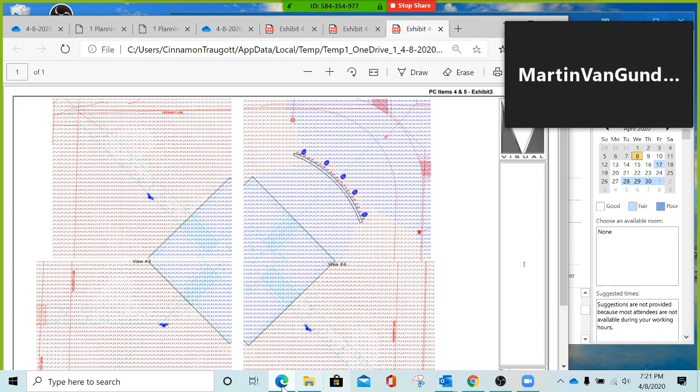With the one comment I'd like Planning Commission to discuss: there is a portion in the code, 113.308, which talks about the smooth side of the fence needing to face out. Now, I'm in agreement with the applicant that the side with the architectural features is the more pleasant side, and that's the intent of that section. The applicant is proposing to place the side of the fence with the architectural feature towards the residents along 9th Street. Technically that does not meet the letter of the law for the zoning code. However, I believe the intent was to put the nicer side of the fence out, and I agree that would be acceptable, provided there's no objection.

This is Tim Fox, and I agree. I believe the intent for that ordinance is that someone putting up a wooden fence, when one side is more attractive and finished-looking for the neighbor and the other side is less attractive, the intent is that the side facing your neighbor should be the more attractive one. And I believe that was captured here.

Thank you, Mr. Fox. With that, I'll throw it out to the members of the Planning Commission. Are there any questions or comments? ...see the height of the fence.

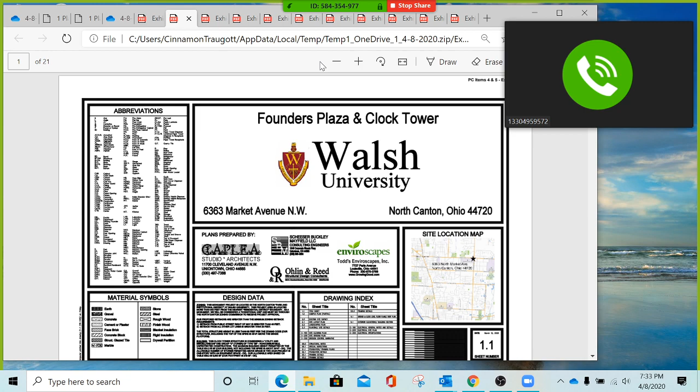This is for the Walsh Clock Tower monument, part of the former BP site at Market and East Maple. We have approximately 155 feet on the East Maple side and 163 feet on the Market side, totaling about 0.57 acres. Last late summer or fall, North Canton approved the zone change from the original BP business to park and institutional. I don't have the exact date, but it was last late summer, fall. If I could go to the next sheet, 1.2, please.

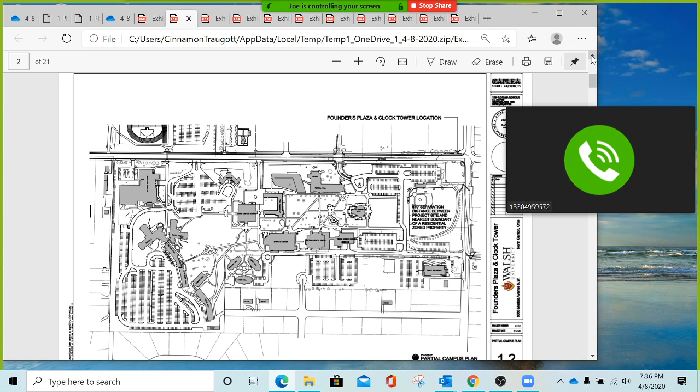Okay, 1.2, so I can get there. All right, sheet 1.2 again just shows the BP site on the corner, and it shows that we are basically more than 300 feet from the nearest residential use, which would be just south of McDonald's. I've got an arrow on there that shows we are approximately 570 feet to the parcel with that residence on the corner. This was, we just wanted to have the campus map to show our relationship to the residential.

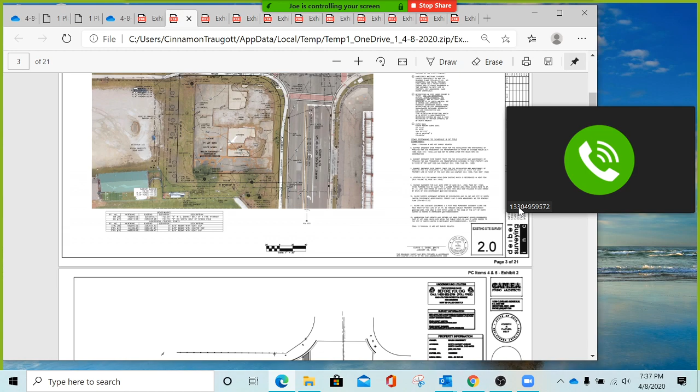Okay, the site survey basically shows here, again it's an aerial, or a regular survey with an aerial photograph on it, that just shows the site the way it is right now. It's pretty much just the old paving that has remained from the BP station, and then they tore the building down and put gravel on that, but basically a lot of hard surface just remains on that site.

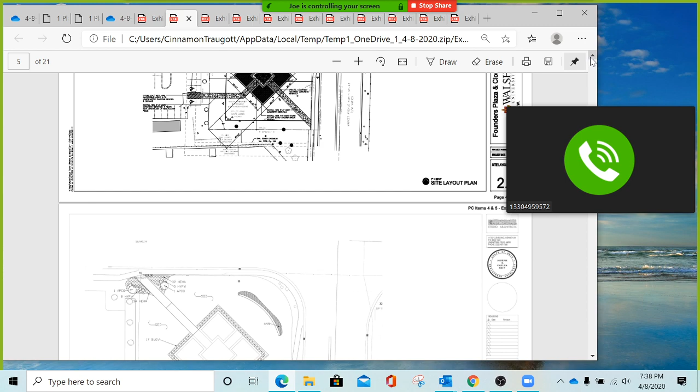Okay, this is our site plan, and again, we have our Market Avenue and our Maple Street. At the center of the site, basically, is our, I'm going to say it's about a 256, or 215 square feet structure. It's not really a building.

No occupancy is going to be inside of it. And I have that in the center, which is going to basically house statues from the original founders of Walsh, or the chapter in Maine. These are historic statues that are coming down and are going to be set underneath the tower.

We have basically sidewalks coming in from both the north and east sides, and then we show another sidewalk coming back to an existing gravel parking lot that would be right adjacent to the baseball building. Again, it's gravel, and down the road this will be improved, and then we are showing where they would pick up handicap accessible parking spaces here adjacent to our site.

Basically, we have concrete sidewalks. The cross sidewalks in the structure itself are going to be a textured stained concrete, and then the pavers on the four corners are going to be similar to the pavers and stone edge that are installed throughout campus currently.

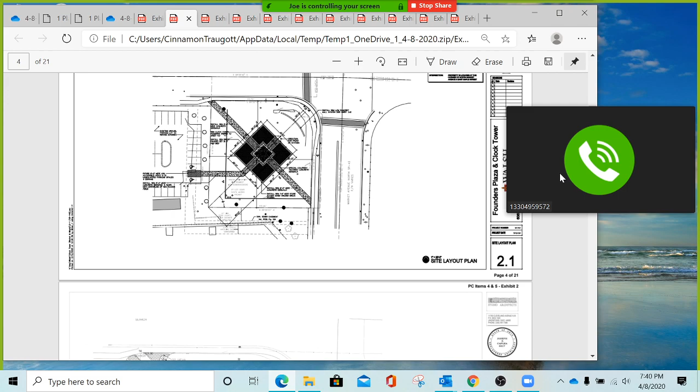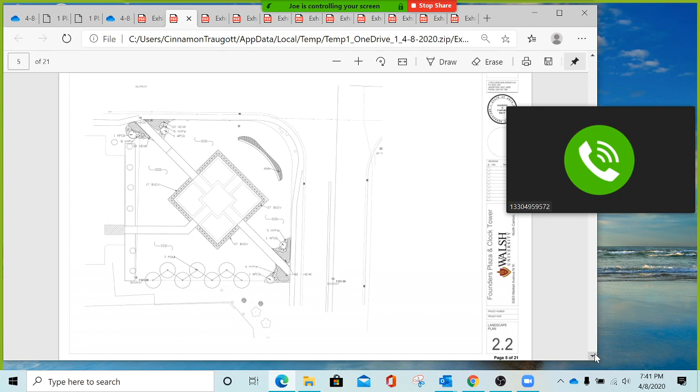More planning details.

This is Kevin's civil drawings, which basically is taking out all the pavement, and then we're just picking up. It's going to be mostly grass areas except for the sidewalk, and then where the statues are will be a concrete pad. The rest of it's going to be grass area with the landscaping we just reviewed.

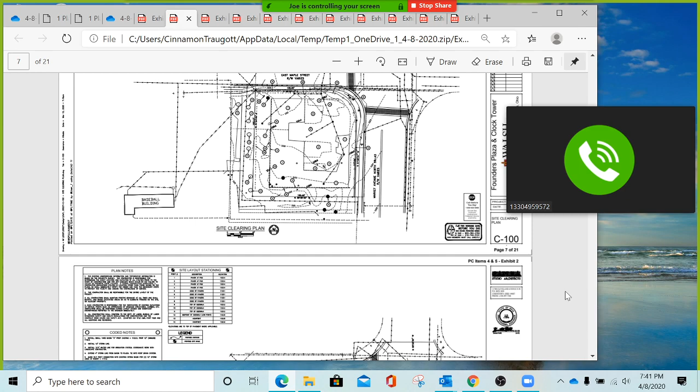The amount of paving that's remaining is less than the paving that is being demolished as part of the demo part of the project.

C200 is just a series of site drawings, and it's not raised up on a high mountain. It's basically just a little bit higher than the sidewalk from Market. So again, it doesn't want to be down in a hole, so it's basically just a little bit higher than that sidewalk.

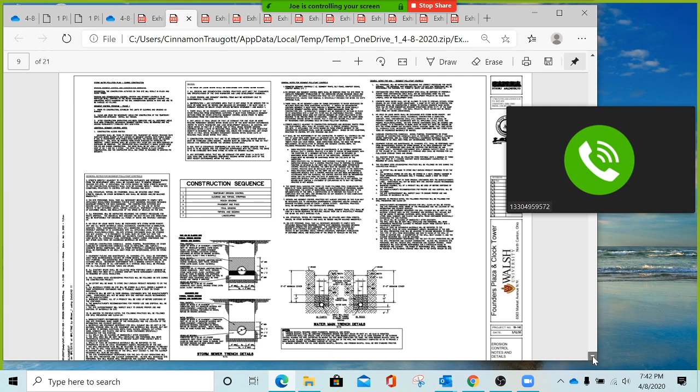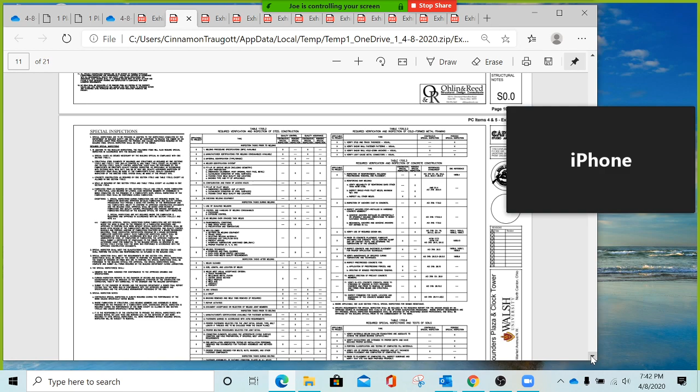This is our structural drawings, which basically our building is a steel structure with masonry and stone on the lower portion and synthetic plaster on the upper portion. And these are just all the steel columns and the steel framing that are going to be part of the project to support it.

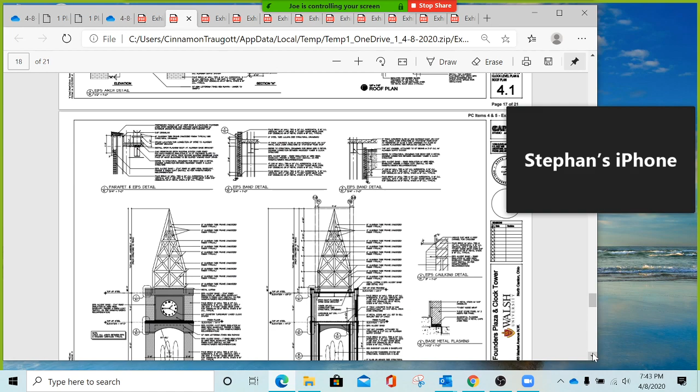This is our sheet 4.1, our floor plan sheet, or it was there. It's coming. So basically on this sheet, I'm going to raise it up a little bit more.

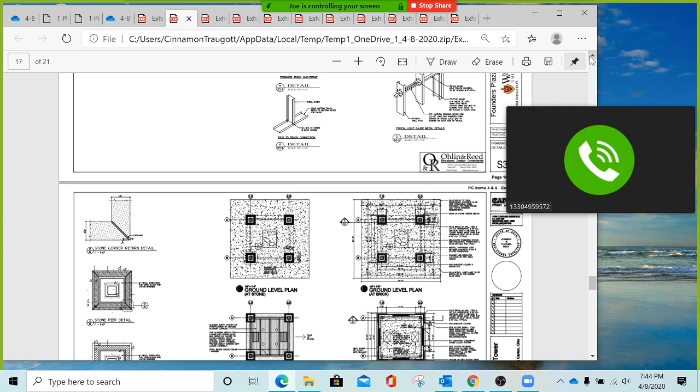Right here, we see the ground level plan. This is where the statue is located in the center of that. And then this is all basically a concrete pad. And with the statues in the center, these four corners are steel, and in the center, block and brick, stone at those areas.

Then we go up and we have the clock level, and we have access to get into that space so that we have the four clock faces that are tied together, and they're on a computer system in that space.

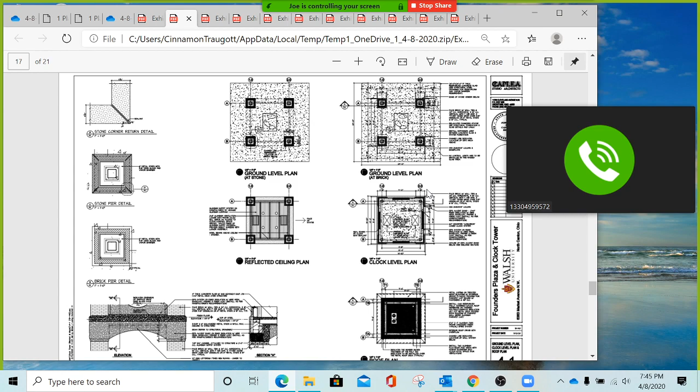It's reflected ceiling plan. I'll talk here and show again when I get to the sections where some of the lighting in this area is, but here you can see we have four circles, which are down lights that'll be located up in the ceiling above the statues, shining down on the statues. And then I'll let our electrical and civil engineer talk to that later on when we get into lighting in more detail.

This is the roof plan, and basically that's just like an EPDM roof system that we have drains in there, and then in the four corners we have our support for the spire that goes up. And we have light fixtures here that'll be mounted, and you'll see it on the electrical drawings, but it'll be mounted to these vertical posts of the spire, and then that'll be shining up to highlight that. Again, Kevin will talk more to that when we get to that point.

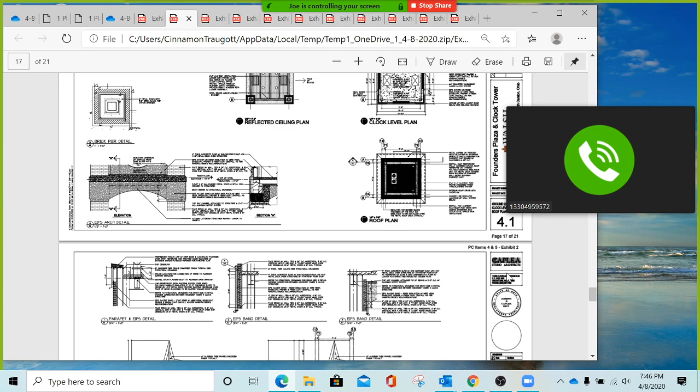This is my section, and I'll go through here. Our statues are set on their existing granite base. At this level, which will be the floor of the clock tower itself, or the clock area, we'll have downlights that shine down into that, so that won't spill out much away from that.

And then we come up and we have the spire portion of that. I'm just going to give us dimensions, just so you know where we are height-wise. From the grade to about the parapet area is about 24 feet, and then from that point up to the top we're 24.9. So our overall height of everything is 48 feet 9 inches.

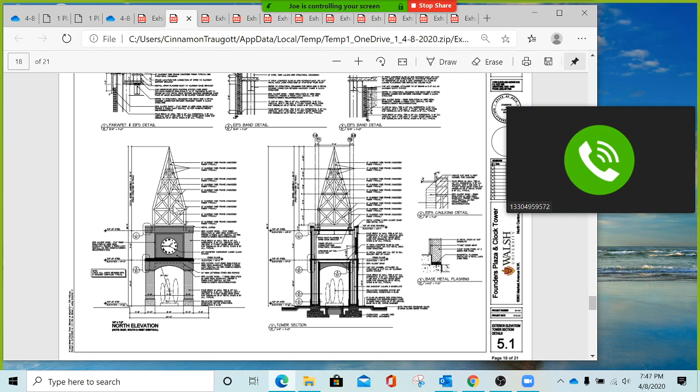Now, in going through our pre-meeting with part of the group in the city, that meets - that's less than the zoning required height, and also is less than the building code height permitted for this building. And then these are just some more details showing our parapet and how the steel spire comes down and rests on the beams.

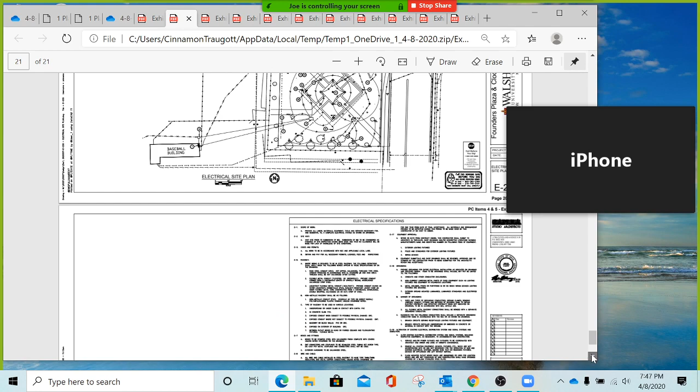All right, Kevin, do you want to take over now on the lighting portion of it? Yeah, go ahead. This is Kevin Noble. Can you hear me? Yes, we can. My name is Kevin Noble from the engineering firm Sheezer Buckley Mayfield, 1540 Corporate Woods Parkway, Uniontown, Ohio, and I was also sworn in with Joe at the beginning of the meeting.

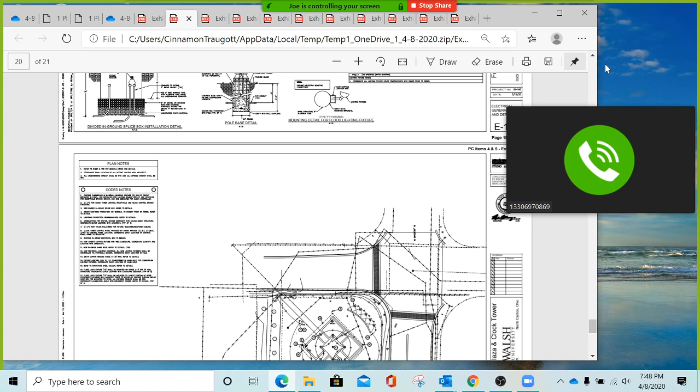Our office provided engineering services for the project, both electrical and site civil. On the site civil end, we did grading and storm sewer. The site currently slopes towards East Maple Street, and there is a basin on site that connects to a storm sewer that crosses East Maple, which was the junction used with the gas station for overland runoff. We're using the same system, and putting some small basins around to make sure we don't have ponding on site. We have less impervious area now than before, so we're actually reducing stormwater runoff into that system.

We also did electrical, and Joe's talked a little bit about it, but I wanted to give you a summary of the different types of fixtures you'll see with this project. We have two different sets that are serving the tower itself. We have 4 recessed lights that Joe showed on the ceiling space, and those are downlights.

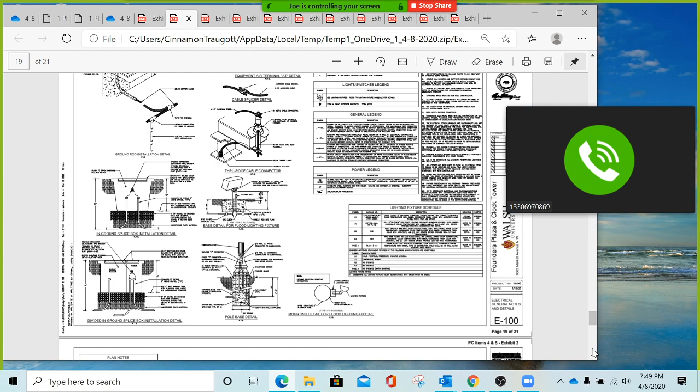We then have 4 uplights with shields. They are on the spire itself, mounted on the spire, and they face upwards. We did photometrics for this project, and we submitted that with our application.

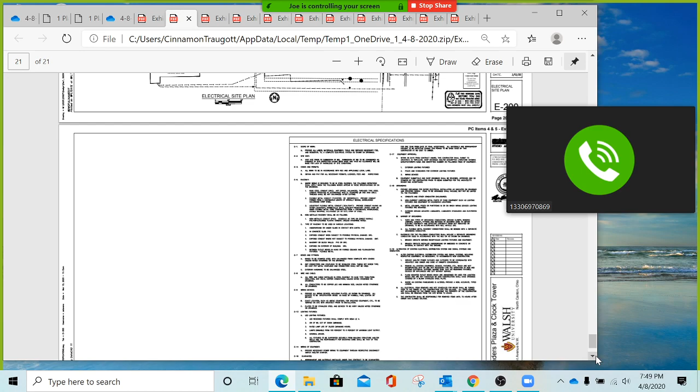Code says no more than 0.5 foot candles at the property line, which we've done. We also tried to do the same thing with the top of that spire, trying to control or minimize any atmospheric pollution that we have, and we were pretty successful in doing that. The photometric programs out there really aren't made to try to do something in a vertical up direction, but I think we've got a pretty good handle on that.

So we're trying to be sensitive to atmospheric pollution, trying to basically say at the top of the spire we want to have 0.5 foot candles and meet what we have down below. So those are the two different groups that we have on the tower itself.

We have three different types then on site, on the ground. These three types I'm going to talk about are all low voltage, 12 volt systems. We have pole lights, and one pole light is going to be on each of the three sidewalks that are coming into the tower. That's one group of fixtures.

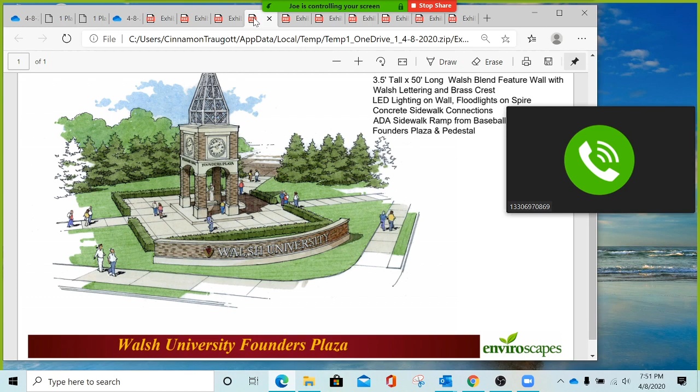Then we have eight accent lights, and these accent lights have cutoffs to them. They're pointed upwards, and they're underneath 8 of the trees that are being planted on the project.

And then the last set we have 5 wall lights, accent lights again, facing the monument wall that we have for the project. What we've done with those is also have cutoffs to them. We're trying to be sensitive to any glare that we'd get off of Market Avenue North or East Maple Street.

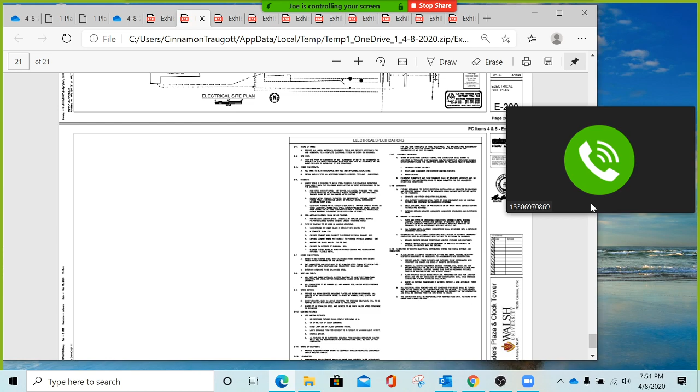The way we have those aligned, kind of shown on our E200 plan, we've pointed them inward to the sign, away from that road. And on the plan we put some arrows, or boundary lines, showing where that glare, where the illumination will be. So those are the 5 different types of fixtures that we have on this project.

All right, well, thank you very much for the presentation you have here. And I guess with that, I'm going to see if there are any comments from the city. Mr. Van Gundy, do you have anything to add?

Yes, sir. Thank you. We also did a pre-application meeting and had several conversations and follow-up. We would like to say we appreciate the design thought that went into the project, and look forward to seeing this being a vital part of one of the gateways into the city. The project does meet the requirements of the zoning code. Staff does recommend approval for the conditional use permit for the project. I also included as part of the agenda packet a letter from the fire department on this project and the previous one, approving as submitted.

Thank you very much, Mr. Van Gundy. I just want to mention that at this point we would be looking for a motion, or questions from the rest of the commission members, but this is in regards to the conditional use portion of the agenda. So at that, if there's anything from the members.

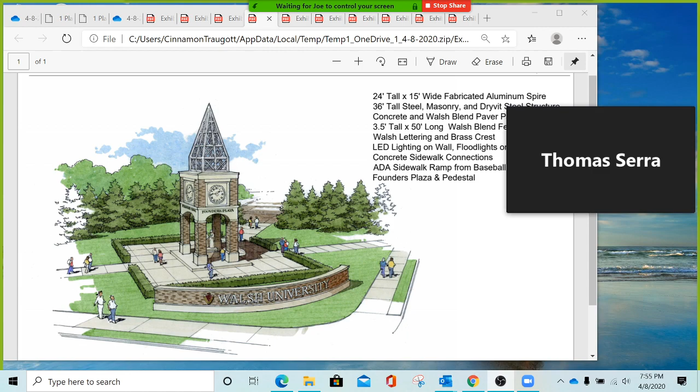Thank you. So the area is going to be well lit, but not too bright for traffic. On the platform where the statues are, there is an elevation change, but it's not really intended for people to walk up, for handicap reasons. It's just to be able to walk around it. Is that correct? That is correct. Thank you.

Thank you, Mr. Serra. Are there any other comments? Or is there at this point? Oh, I'm sorry, yes, Mr. Bowles. This is Peter Volas. What is the timeline for the project?

Well, I'll probably ask Marty, what's the status of the approval on the drawings that we submitted? And if we're ready to go, I'm assuming that they would start construction almost immediately. That's what the intent was before the virus.

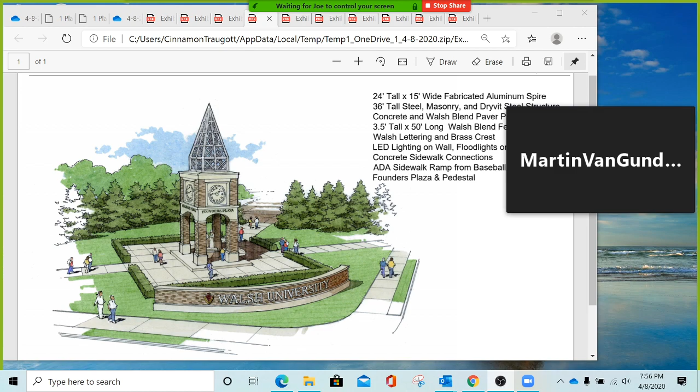This is Martin here. Plans are approved. We'll be able to issue a permit as soon as tomorrow, provided the project is issued the approvals tonight. We can issue permits tomorrow on that. Thank you, sir. Thank you, Mr. Van Gundy.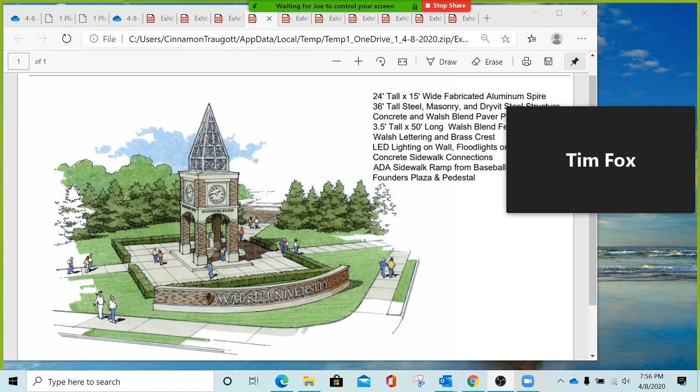Mr. Chairman, I believe at this point, because this is part of the adjudication hearing, if there are members of the public that wish to offer evidence for or against the application, it would be appropriate for the commission to hear those before it takes its vote. Thank you very much, Mr. Fox. That's correct. Is there anybody from the public who wishes to offer evidence for this portion of the adjudication hearing?

Is that someone trying to come on, or is that not the case? Nobody is unmuted from the public.

Okay, well, thank you. I guess with that, then I'll bring it back to members of the commission. Do we have a motion for the conditional use for this project?

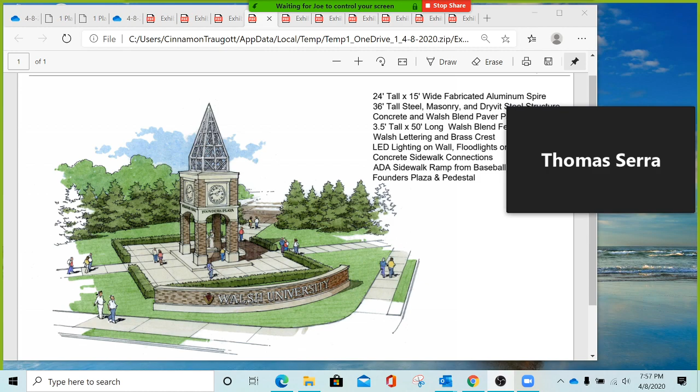This is Tom Serra. I'll make a motion to approve the conditional use permit for the monument clock tower at Walsh University. And we have a motion on the table. Do we have a second? This is Brian Mihalcin, I'll second.

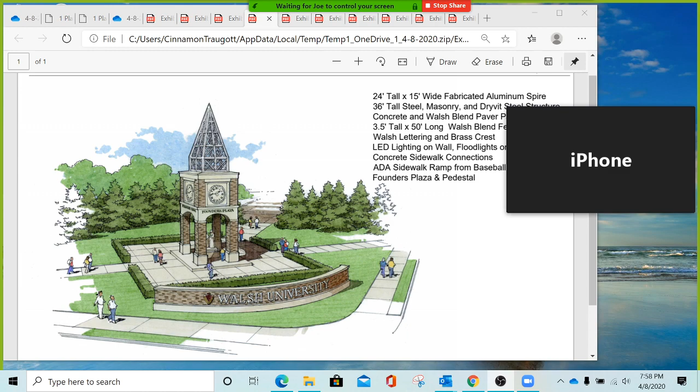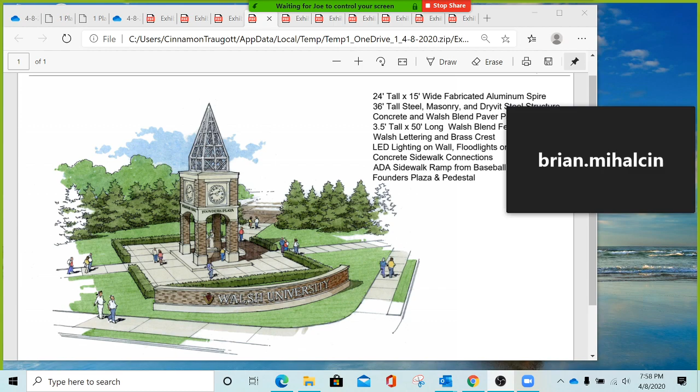Thank you very much, Mr. Mihalcin. We have a motion and a second. Would the clerk please call roll? Yes. Mr. McLeaser? Yes. Mr. Serra? Yes. Mr. Dalpiaz? Yes. Mr. Volas? Yes. And Mr. Mihalcin? Yes. Thank you very much. Okay, so the conditional use portion, which is item number 4 on the agenda, has passed.

And that will bring us into item number 5, which is the application for the preliminary and final development plan for the monument clock tower at Walsh University. Is there anything additional that needs to be added from the applicant?

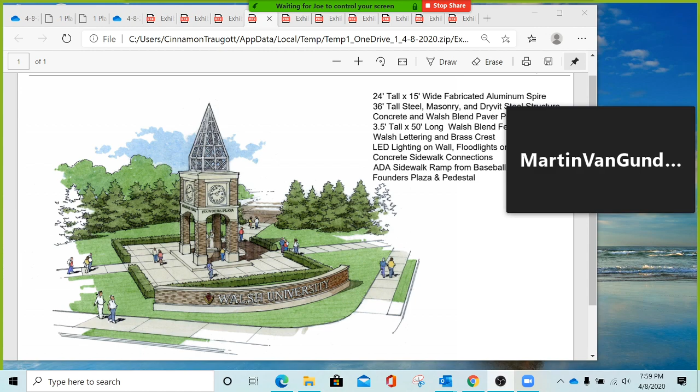I think we're good with the information we presented. If there's any other questions, we'd be glad to address them for you. Thank you, sir. And Mr. Van Gundy, anything additional to add before we vote or move on the process for this? No, sir, we covered it fairly well during the presentation of the conditional use permit. Staff is also in support of approval on both development plan reviews on the project, and again, look forward to seeing its completion. Thank you, Mr. Van Gundy. Anything from the commission members? Nope. Anybody from the general public have any further comments in regards to the clock tower?

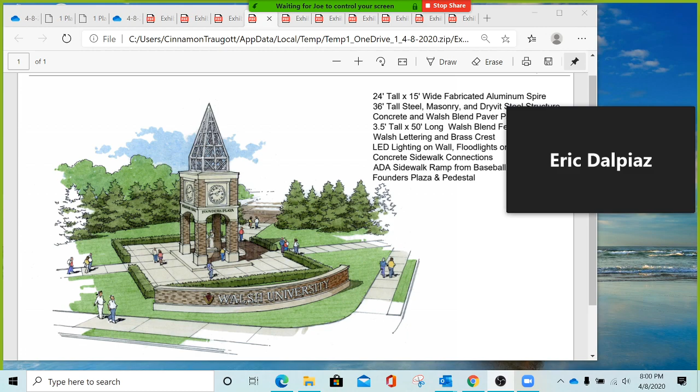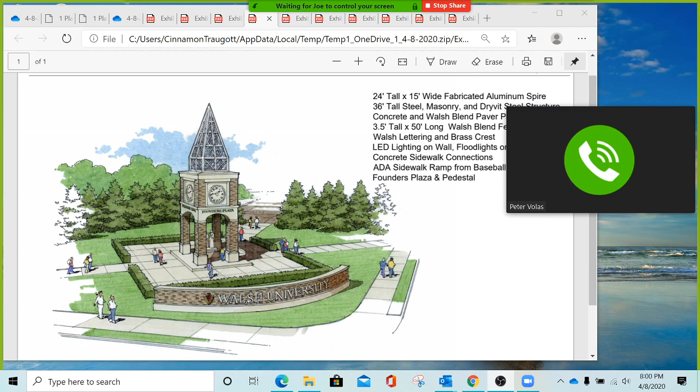With that, I would entertain a motion. This is Eric Dalpiaz, I'll make a motion to approve. We have a motion from Mr. Dalpiaz. Do we have a second? Tom Serra will second it. We have a motion and a second for the approval of the item as presented. Could we please call for a vote? Mr. McLeister, yes. Mr. Dalpiaz, yes. Mr. Serra, yes. Mr. Volas, yes. And Mr. Mihalcin, yes. Thank you very much. All right, item has passed.

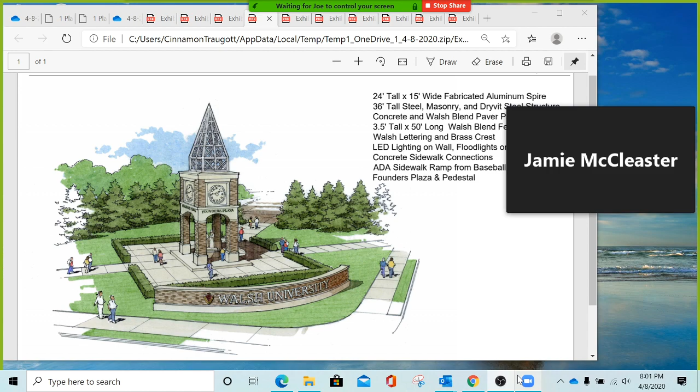We have previously discussed item number 6 on the agenda, so we're going to move on to number 7. This is a resolution requesting the Planning Commission to recommend to City Council amendments to the North Canton codified ordinance, Chapter 1133 for single-family and two-family residential districts, and Section 113308 accessory use regulations, subsection E, which has to do with fences and walls. With that, Mr. Van Gundy, are you able to walk us through this?

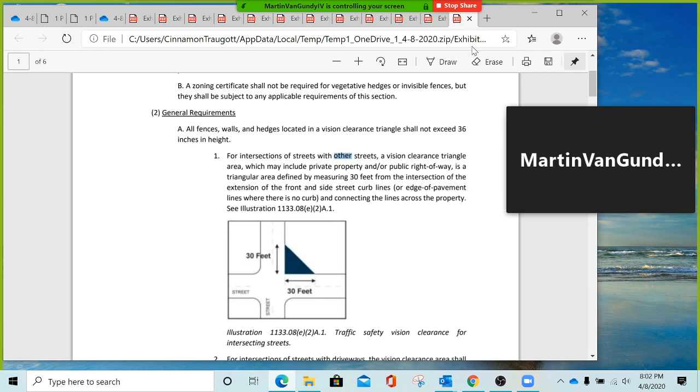Yes, I am. We are pulling up the exhibits here. As soon as we get those pulled up, I will request control of the screen. Be getting started here, there's a bit of a delay. I see what Mr. Caplia was experiencing. Okay, so in general...

This item proposes a complete strikeout of the existing language found in 113308, paragraph E. We would be taking all of that subsection out and replacing it in its entirety with the proposed language on the screen. This does several things: it provides regulations for fences that we don't currently have, and it also addresses walls and hedges, which are currently unregulated. One thing to note is that if this moves through the legislative process and gets adopted, once enacted, any existing installations would still be regulated under the current rules.

So let's say there are hedges that are in violation of the new ordinance. Those can remain as long as they qualify as a non-conforming use in the code, which identifies particular criteria for how they're to be maintained, and explicitly states you can't expand it, or in some cases can't replace them. At any rate, this new fence ordinance wouldn't sweep across the city and get everything in compliance. So with that clarification...

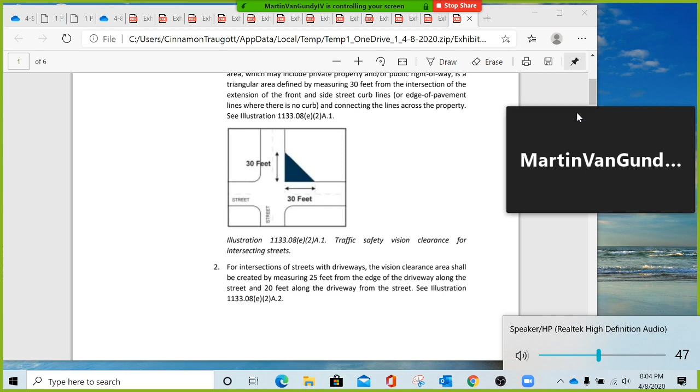This first paragraph, if I can get the screen to go back to it, talks about and clarifies when a zoning certificate is required, and also when it's not required. Essentially, a new fence would require a zoning certificate, and we don't currently have this clarification on when a zoning certificate applies to fences. Now, there's language that talks about repairs of existing fences, which in general does not require a zoning certificate. Essentially, a fence can be repaired without having to come and get a permit, or a zoning certificate rather. We often will synonymously refer to the zoning certificate as a permit.

The second subsection B talks about hedges and those invisible fences that are often underground, used for keeping pets on the property. Those would not require a zoning certificate as well. So the next section, the general requirements, starts to clarify and define some dimensions that are already outlined and have been utilized through the ODOT standards. This puts it in with the fence ordinance and clarifies what that safety vision clearance for traffic is. On corner parcels where we have two streets at the intersection, essentially, as you see in the diagram on the screen, it's 30 feet in each direction.

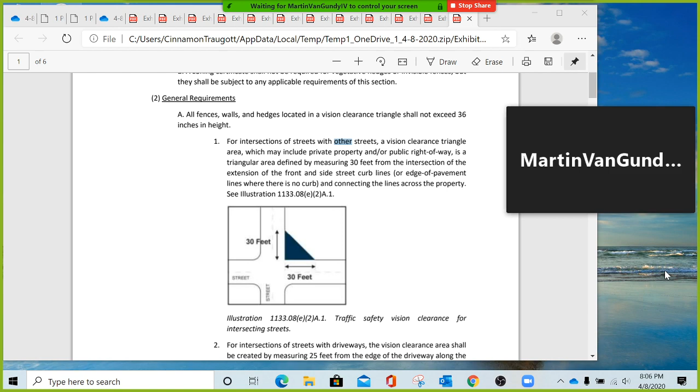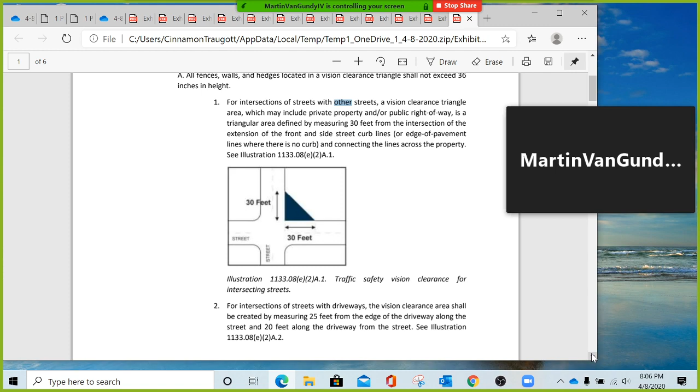And where that becomes important is here, not too much further ahead. It does limit the height of the fence in those areas generally to 3 foot. On the next page, it starts clarifying, or establishing rather, a sight triangle for driveways where they intersect with streets, so folks can pull in and out of their driveway without a fence obstructing their vision. Some of these streets are very busy, and you need that area to see oncoming traffic.

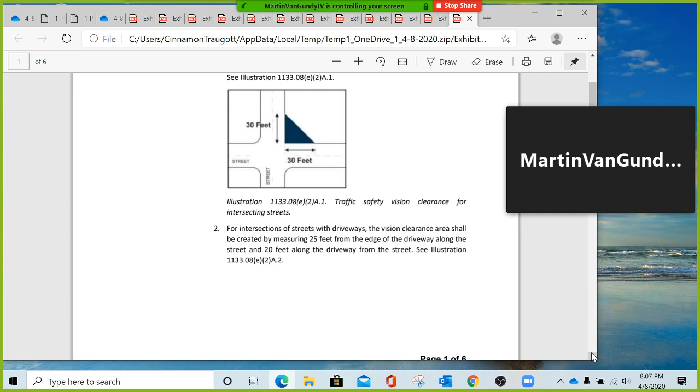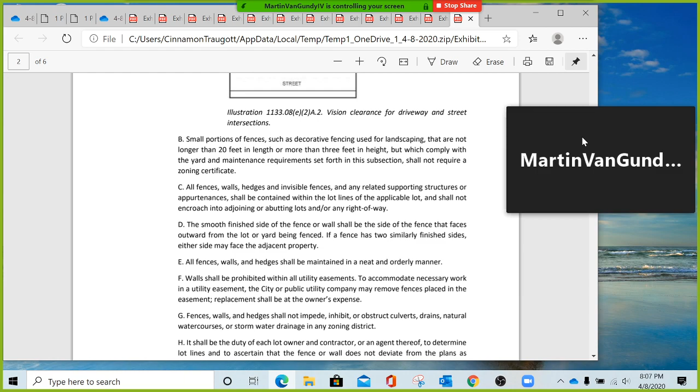Let's see, this does not want to be moving ahead. I apologize for that. So it's hard to gauge where it's going to end up. It jumps quite a bit ahead.

At any rate, there's again clarification in there which talks about where fences can and cannot encroach. For example, obviously they need to be maintained on the property in which the property owner is, and you would think that's common. However, we often see fences where someone is trying to maximize their property and not paying much attention to the actual property lines. So there's some clarification in that, some maintenance.

Now, materials rather, it talks about the materials of the fence. There's some clarification in here. It talks about prohibiting electric fences, barbed wire fences, or other types of even razor wire fences and those types of things. There are other sections within the code which prohibit some of this, but again, it puts it in with the fence ordinance and makes it part of the zoning review, whereas some of the other places you'll see some of these is in more of a criminal part of the code.

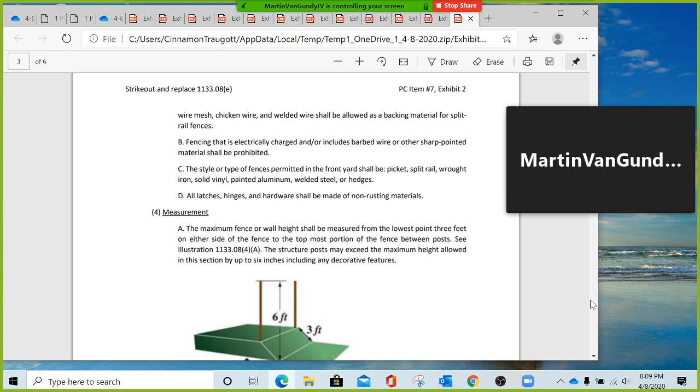Okay, so clarification on the measurement. This talks about, of course, where the property line is parallel, or the fence rather. It doesn't necessarily need to be on the property line, but if the fence is parallel to either an incline or a decline, that's this detail we're seeing here that we need to take into consideration within that 3 foot area away from the fence.

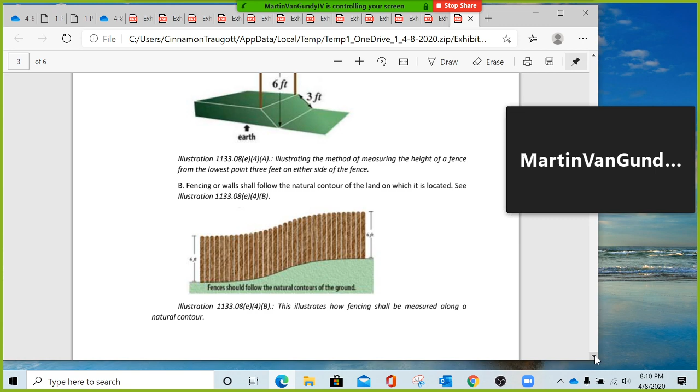The next detail we're seeing here is a clarification where the fence is running across the contour. This makes it a requirement that the fence follows the contour, so we're not seeing those gaps underneath the fence. And we do see those at times.

Again, some more clarification on the height of the fence if it's put on top of a retaining wall. That jumped ahead quite a bit again, let me get back to that. When we start getting into retaining walls here, I do want to go over some of that.

In general, we don't have anything which specifically regulates retaining walls. In some cases it is a fence, in other cases it's not, and it wouldn't necessarily have zoning regulations that talk about how to configure or place a retaining wall in relation to property lines or even sight distances to the road. The proposed language would have some limitations on heights of the wall.

It also talks about essentially when a building permit is required, that it needs to go through the chief building official for application of either the Ohio Building Code or the Residential Code of Ohio. It also has language that would limit a high or tall retaining wall on a property line. Theoretically, with our current language, we can have a retaining wall right to the property line where maybe the house sits up higher than the road, so when you're walking on the sidewalk, you could be up against a 6 foot, 8 foot high retaining wall where the slope warranted that.

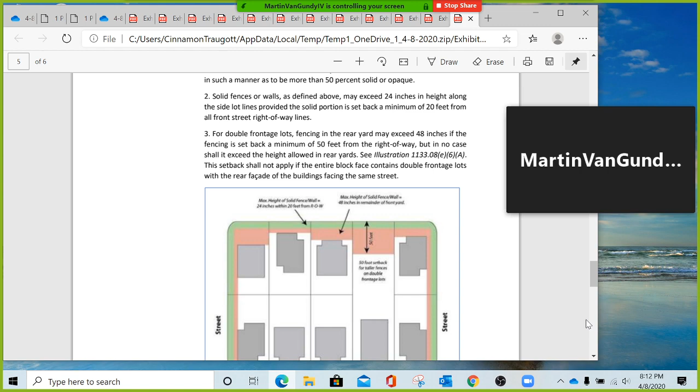This is Brian Mihalcin. One question I had, kind of minor, is with regard to hedgerows, whether anything new would be regulated for height. I'm thinking about the scenario where you've got an intersection where you've got a new hedgerow that's regulated by maintenance, and on another corner it could be unregulated based on it having already been grandfathered in.

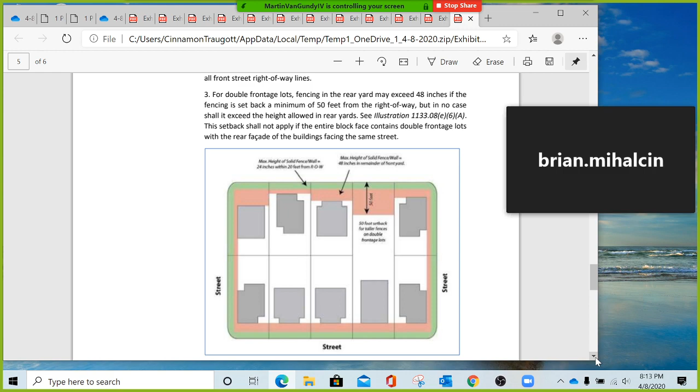That certainly could exist, where of course the new installation of hedgerows would be required on that. Now, in regards to some of the sight distances, because it is a safety hazard to traffic, those have not been given the same exception to the zoning code.

So if it is indeed obstructing traffic, we do contact the property owner and have them modify the landscaping so as to not prevent traffic from seeing around the corner in that safety triangle—more looking at it from an ODOT standard as opposed to a zoning standard, where this would have clear language in the zoning code. Not so much on the hedges, but on the fences, we would have that as part of the review process.

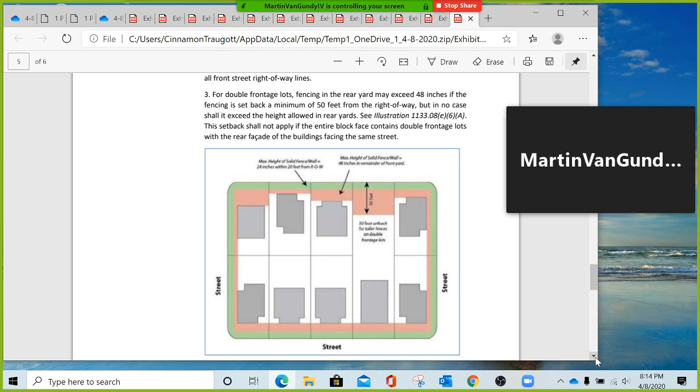This is Tom Serra. So under materials, you don't have masonry. What about all the masonry walls that are on Main Street? This does only apply to the residential zone districts, so theoretically—just off memory—I don't know that we have any residential zone districts on Main Street, so this would not be a conflict with the masonry wall on Main Street. However, if that is a material we'd like to see included, we can certainly put that in there.

It's not really intended to be an all-encompassing list, but we can certainly modify that. Another one is chain link. Chain link is not on that list, but is a fairly common type of fence. They can, of course, be done so they are appealing, but you get some chain link fences that are not so appealing, particularly where you put the privacy slats in and don't maintain them. Some color-coated chain link fences could be something we consider as part of this in the front yard, particularly if that's the direction we want to go in.

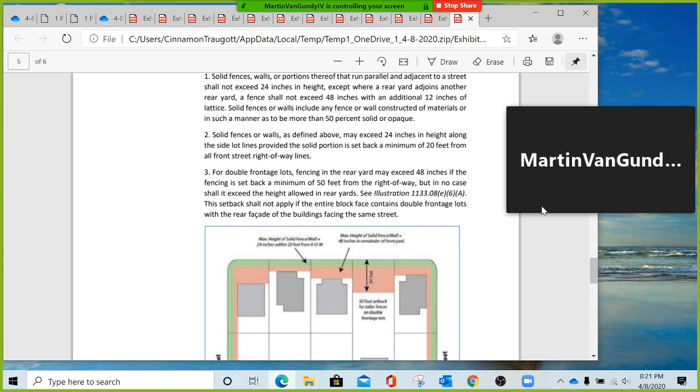Thank you, Mr. Van Gundy. Are there any other questions as of this point before Mr. Van Gundy proceeds? No. Okay. So another, was there one more?

Well, yeah, I guess I want to go back to the masonry issue, whether that should be added. Let me use an example: going to Fieldcrest, there is a masonry wall, and people do build walls at their entrance drives going into residential allotments. So should masonry really be added as an acceptable material? I just want to make sure we're not missing this. I'm using Fieldcrest because everyone knows it, right? I think Bobolink has something similar as well. You're right, yeah.

And if that is the desire the commission would like to go, I would recommend that we try to be specific about masonry. As you know, the CMU, the concrete masonry unit, is technically a masonry wall, and those are not appealing in the least bit. Well, unless I put stucco over it. I know I'm making this a lot more complicated, but I see that could happen with some type of hard surface material. So I just want to make sure we're not missing it.

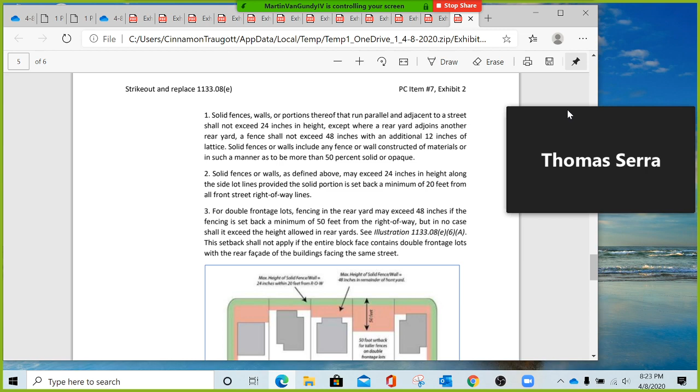This is Eric Delpace. Mr. Van Gundy, I guess this is somewhat confusing when we're talking about fences and ultimately walls, because we're defining a fence, but then we also reference walls throughout this section. In the wall definition, is that defining masonry? I think that's leading to some of the confusion, because to Mr. Serra's point, people do masonry walls in the front yard, beside the driveway and entrance to a home on a larger lot. So I wouldn't consider that a fence, I would consider that a wall. So is the wall being defined somewhere, what materials are acceptable for a wall?

Because in some of this, it talks about fences or walls, and then it defines a fence as being somewhat opaque, but a wall being solid, and solid fences or walls. So I guess that's the question: where is wall defined, what it is defined as? Because I wouldn't consider what Mr. Serra is saying as a fence, I would consider that would fall under the wall section.

I agree with that logic. A board-on-board fence is not a wall. Right. So I guess that's kind of, I think partially the way some of this is written, it conflates the two definitions and crosses them over somewhat, where it seems like they should be more specifically separated, I guess.

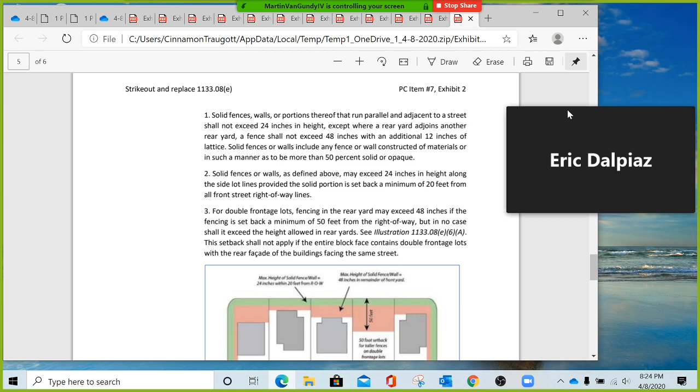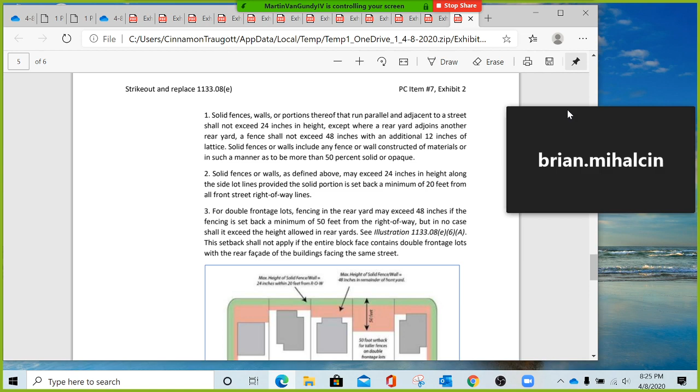That is a good point, and I don't see where the wall materials are specific to, say, a retaining wall in the front yard. I would agree, and specifically in reference to a landscape wall versus a retaining wall, whereas one has structural properties, the other does not. Right.

Yeah, so I will make a note here to clarify on the materials. That material section would apply to the walls particularly. We can add a section there which clarifies that masonry walls are permitted, with some language to keep it more architecturally pleasing, as opposed to having just a plain CMU wall in the front of the property.

Do we need to define that further as far as what materials, or is leaving it just saying that it needs to be decorative in nature or more pleasing? Does that cover our bases here for what we're trying to accomplish? That works for me. Okay. I think if you go any further than decorative, you're verging on an architectural review board type of criteria. Yeah, good point. Agreed.

Okay, any other comments or questions as of this point? Okay, Mr. Van Gundy, you can take us further into this if you'd like. Okay, so one more page, right? Yeah, I think we're halfway.

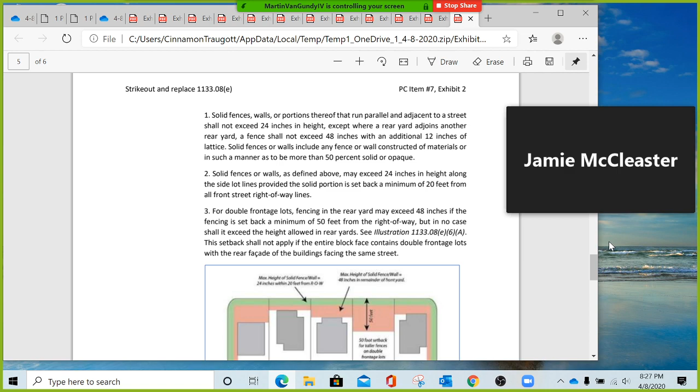So on the heights of walls for solid fences, we're keeping with the existing language on the height for 24 inches, particularly in the front yard or side yards. One exception that is new here is that we're trying to get some of these fences to be more consistent with readily available products. The current ordinance requires that to exceed 24 inches, they go to a more open type fence, the 36-inch fence.

But that material, as I understand, has been reported to us through a couple different fence contractors and several residents, that the 36-inch fence is a special order item, and they end up paying a significant stipend to order that 36-inch fence as opposed to the 48-inch fence.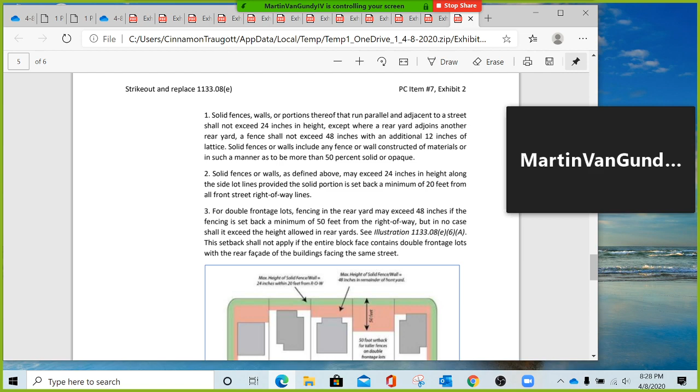What this exception does, on the paragraph at the top of page 5 -- Mr. McLeese, you are correct, I stand corrected on the number of pages left. No problem, at any rate.

So this does allow the 48-inch fence, and it also gives an additional 12 inches of lattice work, in the instance where we have two corner side yards that abut each other essentially. This is in the diagram we're looking at, the situation where the front yards aren't aligned, so we can run that taller fence along the right or left side. That's the first paragraph.

So if we get 20 feet away from the right-of-way lines, again this is not considering those sight triangles. The sight triangles, we're still going to be limited in height.

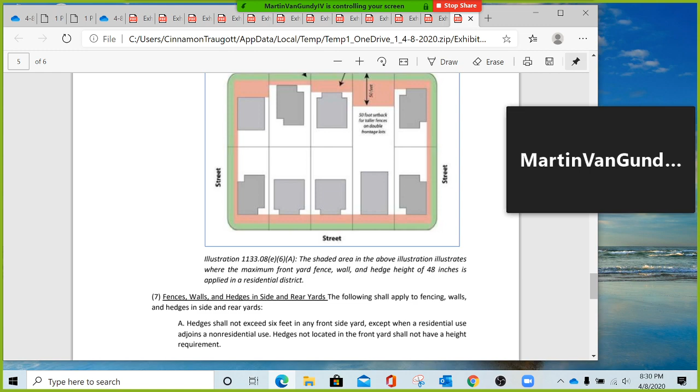The double frontage lots, this is also an example there. We do encounter this occasionally with parcels that go from street to street, and this provides some regulation on where to put that fence, so we don't have potentially a 6-foot fence all the way out at the right of way. This will have it set back, taking into consideration the rest of the block. Again, we don't have any language that specifically limits the 6-foot fence from going out to the public right of way in the rear yard.

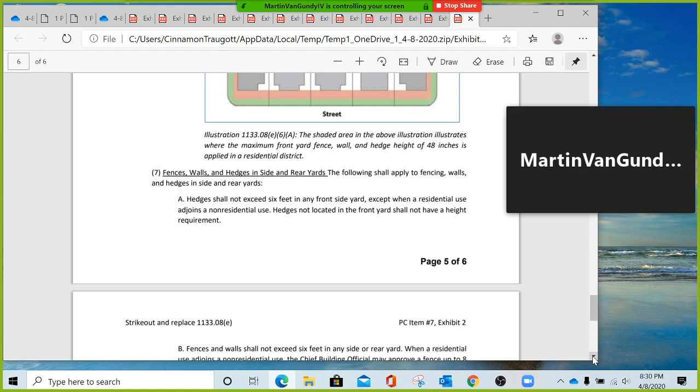So then we get into the regulations for hedges, which talk about a height of essentially 6 feet in any front or side yard. Again, we're going to keep it in line with the fence regulations, trying to keep the hedges consistent with that. As you know, arborvitae get fairly tall, so this would require some height limits.

So when it talks about temporary fences -- was somebody chiming in? No, okay. Temporary fences, clarifying that we don't need to get a zoning certificate for temporary fences, for construction sites and so forth. And then again, a maintenance clause in there to refer back to if we have an issue or a complaint on the fence, giving us some parameters to apply to any fence of concern.

So with that, I will answer any questions if you had any additional questions. Okay, well thank you, Mr. Van Gundy. As he said, do we have any questions or comments from members of the commission? At that point, would we have any comments from members of the community?